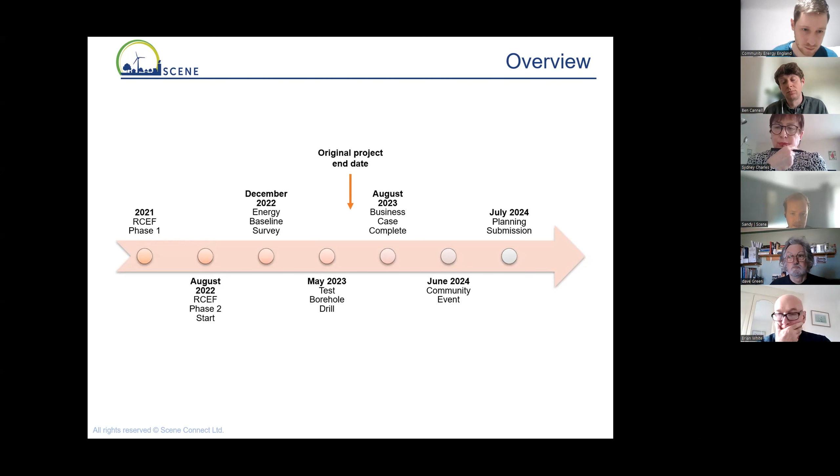We have a community event happening in June to talk through the project and where we go next. We'll be submitting a planning application later this year to try and lock in some parts of this project. So here's a very quick overview.

This isn't the correct graphic, but it's one of our planning graphics, and it shows the network extent. We've got about 150 properties. The green area on the right is the energy centre location, the blue area is where the borehole array would be, and the red area is the planning outline, which is also where the pipe route would go around the village and to the properties.

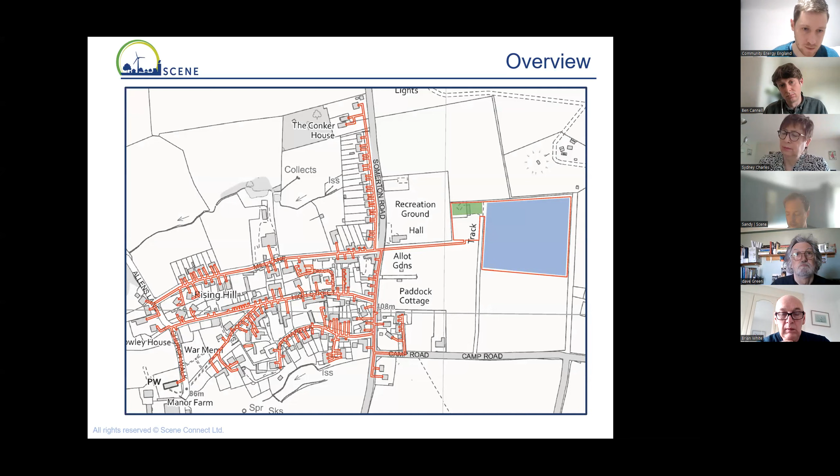A little bit on technical design: this is where we ended up, which was a long and quite challenging process, with 400 kilowatts being supplied by ground source heat pumps from just under 200 boreholes, and a total of 800 kilowatts coming from air source heat pump units.

This is a simplified design, but we went through a very detailed design process to get to this point, and it took a lot of time and a lot of testing of the technical and financial variables.

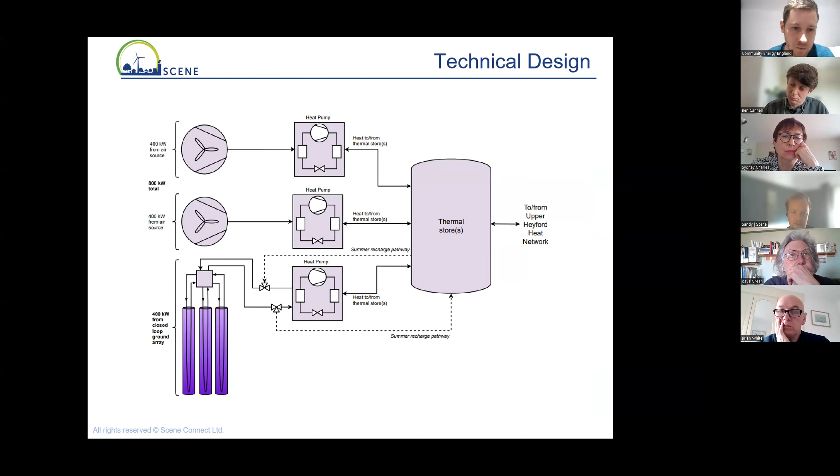So a few pictures just to make it real what we're talking about here. The energy centre site is on a piece of land owned by the parish council, currently tenanted by a tenant farmer. The borehole site is right next to that - in fact, you can just see the sheds in the back there where our energy centre would be. One of our big issues is the aging electricity grid, which I'll talk about in a little while - one of our technical challenges.

And there you can see our thermal testing rig, which sat there for a few days testing the thermal resource from our borehole site. So that's the very quick overview - I hope that's not too fast. I'm sure there are questions, but I'm going to run through where we ended up in terms of challenges.

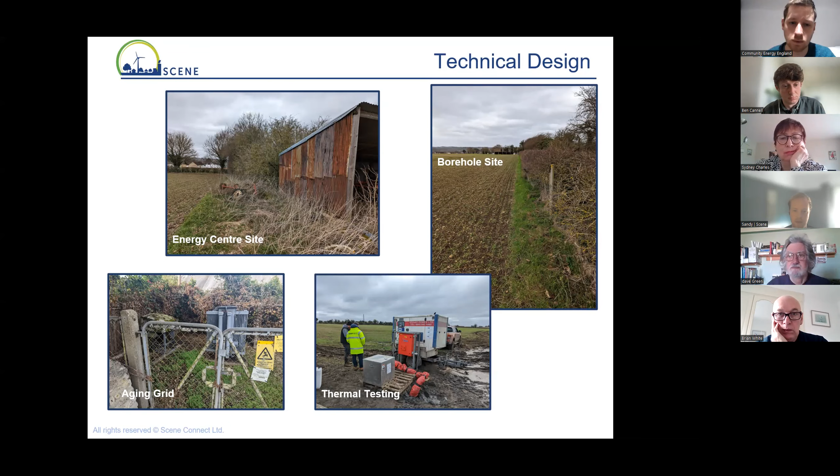We had a few technical challenges. These are probably, in the context of the Swaffham Prior scheme, fairly consistent - at least the low heat density of a heat network in a location like this. We're talking about quite separated properties, a quite long settlement. A lot of pipe work is needed to reach these settlements, and there's thermal losses where those pipes go. So the longer the pipes are and the further away things are, the less suited to heat networks we are.

This is within the Rural Community Energy Fund program, so these are generally rural projects. There's this underlying question about the suitability of heat networks in rural contexts - it's definitely doable, but it takes a certain set of conditions. That's one of the challenges we battled with throughout, and I think any rural project would.

Our thermal resource test returned poorer results than we were expecting. We were working on the basis of the initial consultants' figure of around 4.5 COP - coefficient of performance, for those not in the know - which is how efficient the heat pumps would be, based on the thermal resource we can pull from the ground. That really hits our financial model, and it hits the technical viability of the scheme. It's a real challenge.

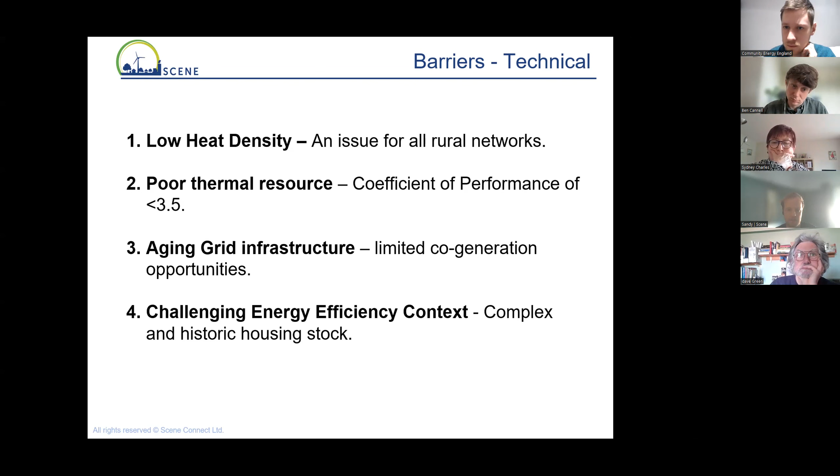So it was about trying to figure out how to model lower than 100% in a rational way. Not just saying, oh, if 50% of people connect, this is what it looks like, because we need to know where those 50% of people are in the village. What is their location? What is their heat demand, etc.

And the last point here is just about legal staging. So all well and good, have a community meeting, get some initial interest. You might get 50% of the village interested in the project. You might get a really high percentage interested. You might want to secure a letter of intent, something to say we would like to go ahead with this should it happen. And that's low commitment. There's not much risk in doing so, and that's something that we got from a reasonable proportion of the village.

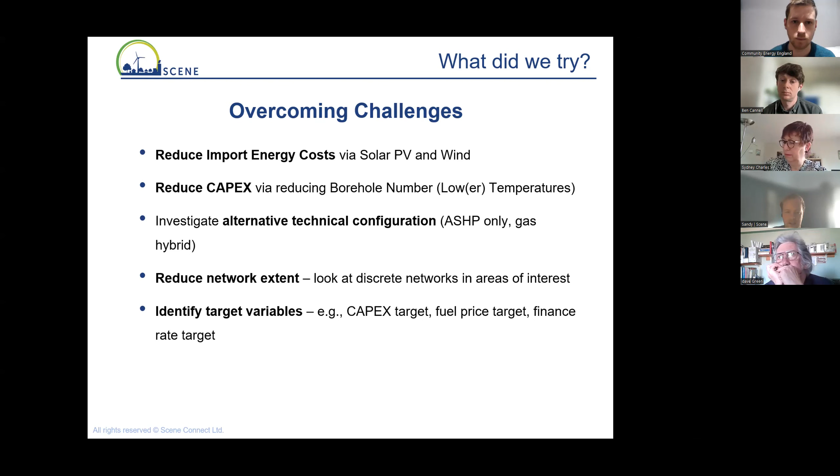And this is quite an interesting one, and maybe something we should have done earlier, is looking at what should our capex be? What's the limit we can go in terms of spend? What's our fuel price target? What do we need electricity prices to be? What if gas prices increase dramatically? How does that affect things? And then the rates of finance we would need.

So very quickly, our next steps: we're talking to the community in June, submitting planning in July, and that's trying to de-risk the project a bit, trying to secure something concrete to help us take forward in future years. Looking at funding for supporting projects, energy efficiency works that people want to do, air source heat pump rollout potentially. Continuing to talk to funders, but it's a bit of a tough one because we don't have a viable business model right now.

And lastly, looking at electricity supply opportunities with nearby housing estates. So with the grid limitations, everyone in the area is trying to make local supply work, battery storage work. So we're trying to kind of jump on other projects nearby to supply our system.

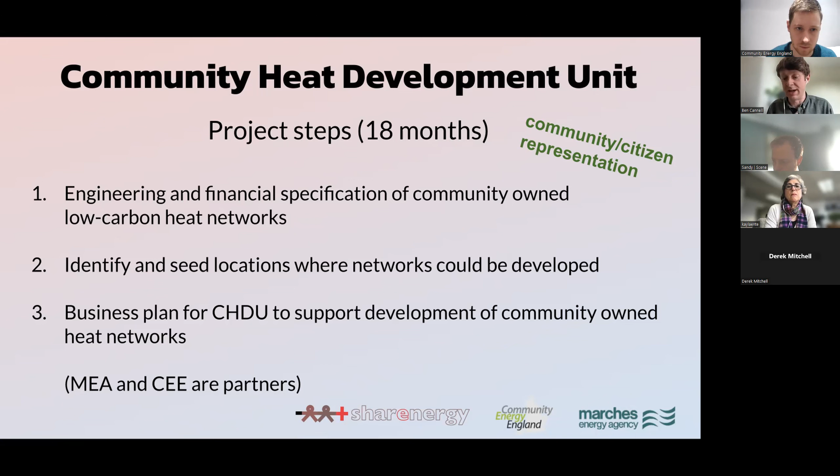And we're working with Community Energy England on this, to help with the community engagement and outreach side of things, and then also the Marches Energy Agency, who'll help us on the modelling and costing of building retrofit, like improving thermal insulation and heat emitters, etc.

So yeah, in terms of progress so far we've mostly focused on research. So looking around to see what low carbon heat network projects have been developed so far, ideally ones which were operational. We've looked at the UK and then some cases abroad, and we've also spent time looking at the different feasibility studies which are available, which have been led by communities. We're trying to take learning from these into our model, to try and shortcut some of the steps in the analysis process.

So the community-led heat networks which have predicted the greatest financial viability seem to have the largest anchor loads in the network, so maybe that's communal housing or some larger public buildings such as leisure centres. Inclusion of renewables in an electrified centralised district heat network always seems to be predicted as improving the project finances. So it seems like that's an important aspect to be able to configure with a heat network.

Targeting 90% of your heat demand using electrified means, and still accepting that you're going to have 10%, say, of your heat delivered by a higher carbon means to start off with, really does improve the project finances from the studies which we've reviewed. So it seems like target 90% electrification, don't go straight onto 100% to start off with. That 10% can always be electrified further down the line.

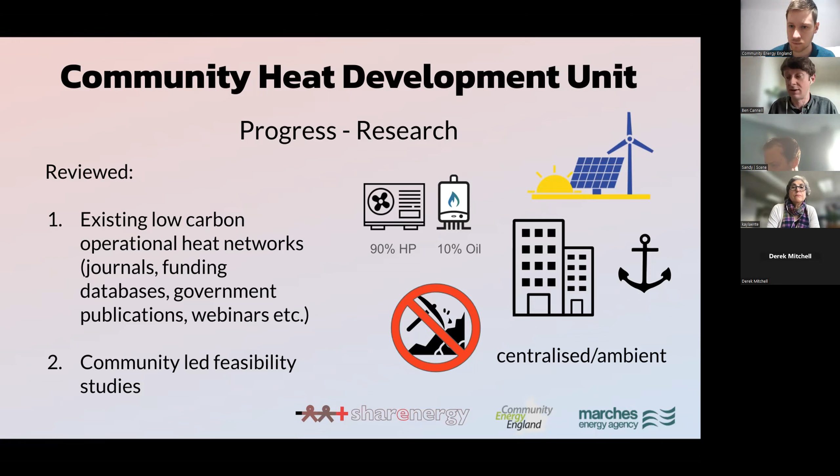Also, we've reviewed different kinds of heating technologies which you'd want to include in the heat network. Mine water seems like a great resource to be used, and has good correlation with high density housing. From our perspective, we're trying to come up with a configuration which is most replicable across the country, and it seems like site to site variation is potentially significant, so there's quite a high risk with replicating a consistent model across the UK for mine water. So that's one of the technologies which we've decided to avoid moving forward for this first instance.

We've also been on a couple of site visits to actually visit real operational heat networks. So one was in Rocks Green, which is in Ludlow in South Shropshire. They've got a biomass heat network which is connected to 96 houses. And then we're working closely with the Bishop's Castle project, which is in South Shropshire again, which is looking to have a centralized heat network powered by a large air source heat pump, combined with an onshore wind turbine.

We've been working closely with the project team there. It's Shropshire and Telford Community Energy and Lightfoot, which are the community groups leading that project. And good news recently in that they received the award of the second stage of CEF funding, which is great news.

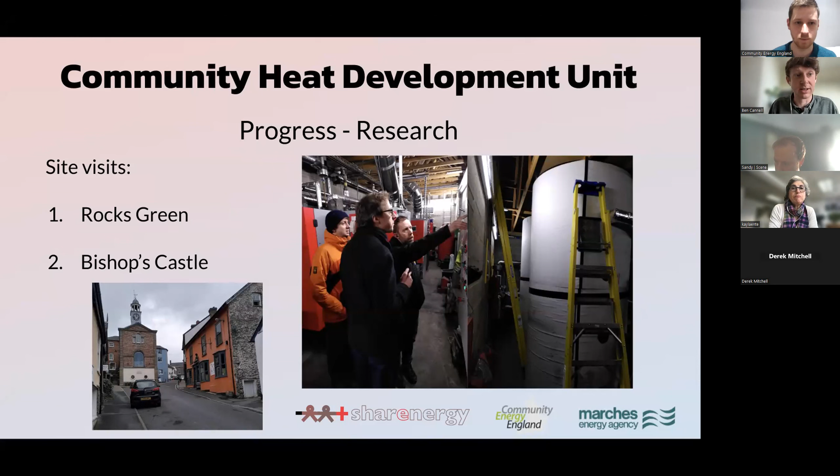So the next stage that we're working on at the moment is the development of our heat network specification. So what configuration of heat network are we going to be targeting that is viable for community ownership. So we're developing a techno-economic model, and we're hoping to work with an engineering focused technical partner on this, to understand what ranges of heat demand we look for across the country, coupled with building density, and also coupled with what level of renewable generation capacity.

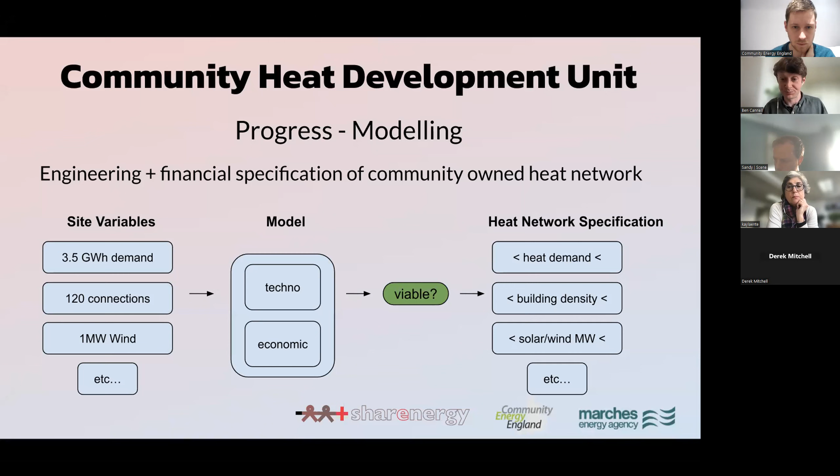So what different ranges of those input values would mean that from a modelling perspective, we think that a community-owned heat network is financially viable. And so once we've developed this specification, we're then going to use the GIS sieve mapping approach, where we are applying those ranges of variables to a nationwide site search. So we can select sites across the country which we think meet this heat network specification.

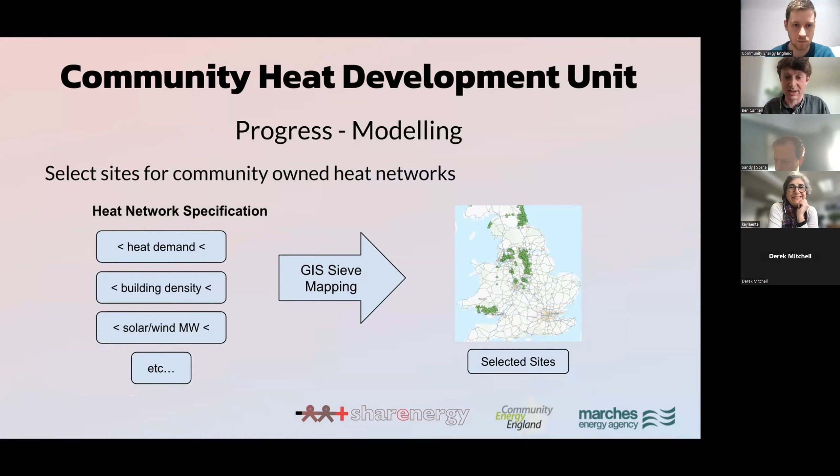So once we've identified these sites, we'll be working with Community Energy England to approach community ambassadors, leaders, and community groups within these locations to try and stimulate enthusiasm and uptake for pursuing the development of a heat network. We want to seed up to 4 case studies in these locations, with a more detailed, lightweight feasibility study assessment of the heat network configuration at these individual locations.

We don't have funding to take the project further than that at this stage. That stage might involve some refinement to our heat network specifications. So maybe we'll go from saying we're looking at these ranges of heat density and building count, to saying something like we're looking for a certain number of terrace houses, a certain number of communally heated buildings, and a leisure centre - something more specific across the country.

As part of that, MEA will be supporting us to understand how building fabric upgrades can be included into our model. Does it make sense to be running our heat network at a higher temperature with less building fabric upgrades, or a lower temperature with more fabric upgrades?

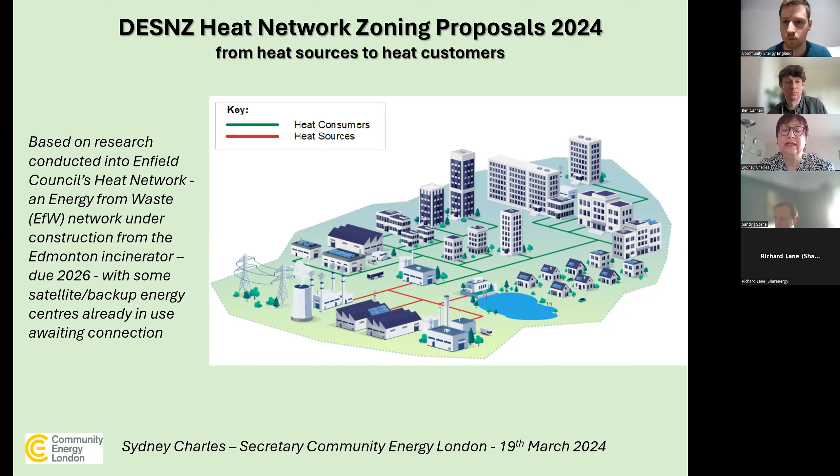Sorry, my name's Sydney Charles, and this is going to be a whistle-stop tour. I was interested in heat zoning following on from an interest in the Edmonton incinerator, and people there are unhappy with having to carry on producing rubbish and also digging up the roads. So we started looking at, well, if they didn't take heat, what would the implication be? And then I started looking at heat zones. I'll go through these aspects very quickly, and at the end then ask some questions.

So, what is a heat zone? Quite difficult to find a picture of it, but I found this one here of a possible sort of heat zone with the barrier around it. And my issue is that if you're not in it, as Sandy mentioned just earlier, if you're not going to be in a heat zone, then they're not really interested. On average, they're thinking of 18 zones a year, coming to 459 zones by 2049.

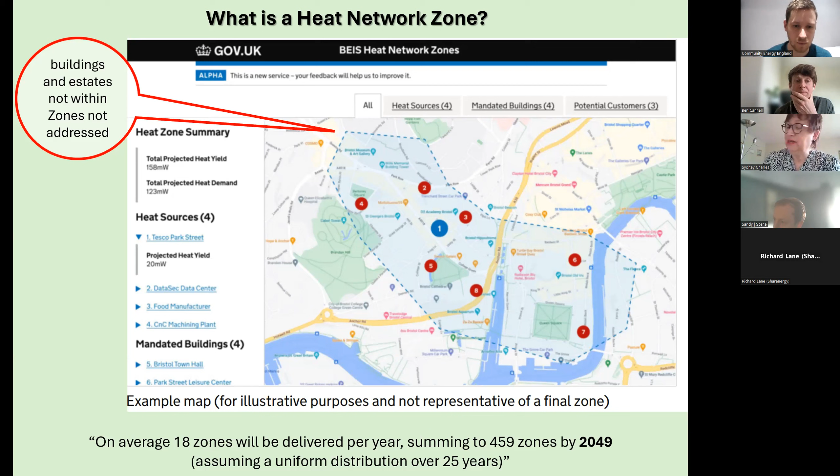So that seems like a long way away, but the definition is a formally designated geographical area in England where heat networks are expected to provide the lowest cost solution for decarbonising heating. But as I said, if you're not in one, then you're not getting any benefit.

So what are the aims of having these heat zones? The primary aim is low carbon heat, which we all agree with, and the consultation asks, well, what is low carbon heat? Can we allow 147 grams of carbon per kilowatt and still call it low carbon? I think most people replied, go with the 44.

Now, in the studies that I've done in Enfield, their heat network, they say that it's only 21 grams of CO2 a kilowatt, but they exclude all the infrastructure that you need for the heat network, which seems a bit of a missing out. Secondary aim, of course, is low cost heat, and Ofgem is supposed to be looking at that for consumers. But Enfield in particular will spend at least 100 million to deliver heat compared to just leaving people to do their own heat.

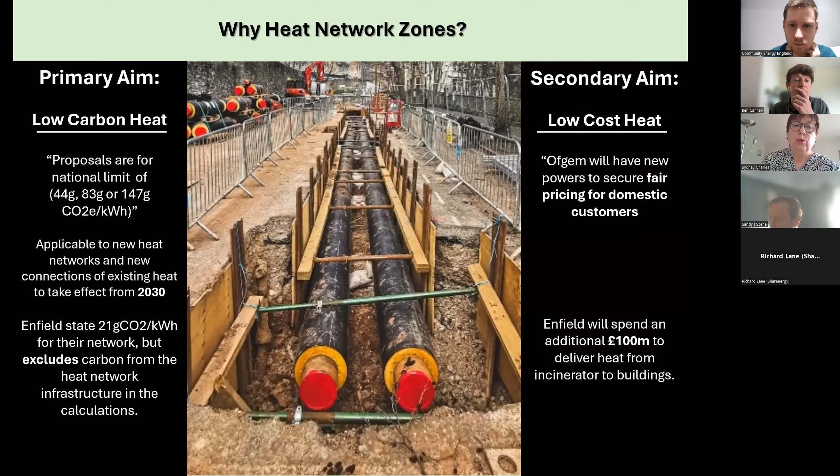Another aim, which is not actually stated, is that heat network zones will also provide project sponsors and developers with a certainty about connections that will be required to secure investments for construction. So enabling the heat network industry to be profitable seems to be another aim. It's not actually stated sort of upfront.

So which buildings will have to connect? I'll start with what are not required to connect. Ordinary residential buildings with their own heating systems won't have to connect, but they could do. And any building, as we just mentioned, if they're not in a zone, they won't have to connect, leaving them with no sort of government support for low carbon heat.

But who will have to connect is new buildings, non-domestic buildings, and buildings that are already communally heated. Now, this one that I've got a picture of here is Enfield Wash, which has got a Kensa ground source heat pump array, paid for, I believe, by the local authority decarbonisation fund. So the capital has been paid for, and they say the customers find it very cheap, but I haven't got evidence of that yet.

But the Chartered Institution of Building Services Engineers are unhappy with the consultation, as it implies that even if a development can demonstrate a lower carbon heating solution, they will still have to connect if they're in a zone. So they're not happy about that.

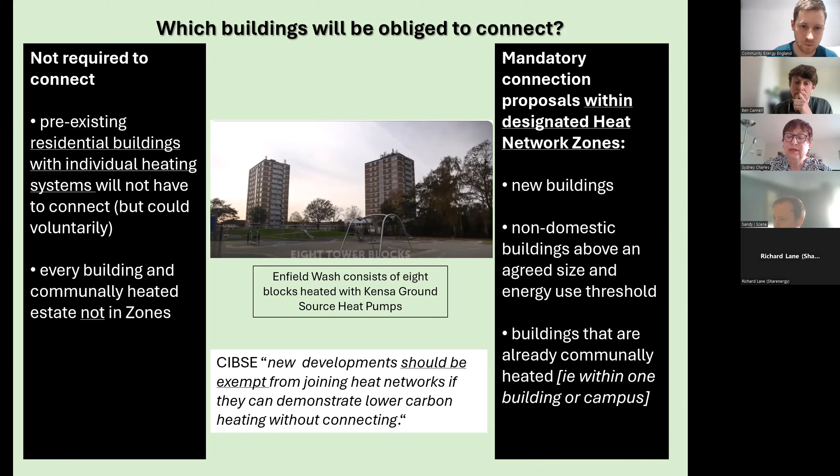So who would administer this? Central authority will have quite a big department in DESNZ, and there will be zone coordinators in every borough. You can read what they have to do, but appointing delivery partners is basically giving out the work to commercial companies, which one has to be very careful with, and also requiring owners of heat sources to provide heat, which I know one of the consultation responses from a data centre association was not happy with, for various reasons. And they are thinking there'll be 5 full-time staff per zone.

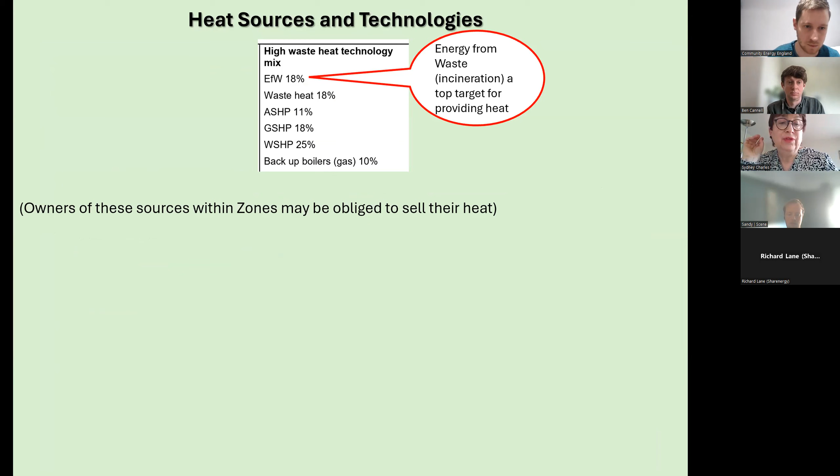Of course, that's up to 2049. Well, I certainly won't be around by then. So what kind of heat are the heat sources they're expecting? They're expecting 18% of it to come from energy from waste, which is why my interest is quite high in incineration. And owners of those sources within the zones may be obliged to actually sell their heat.

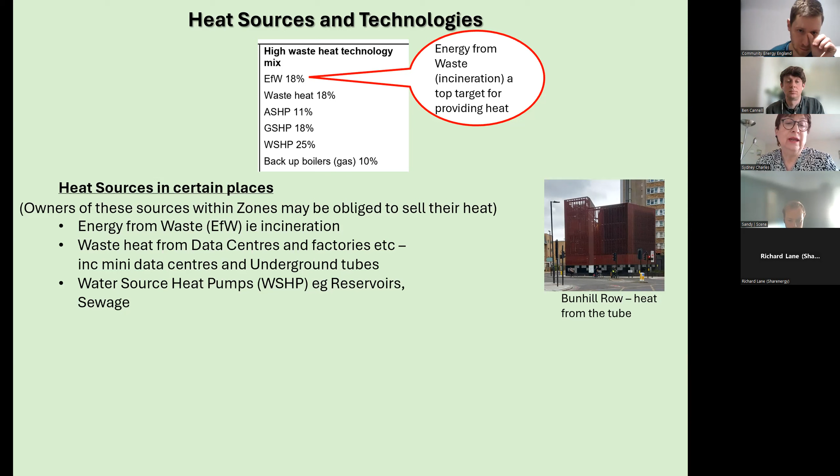Some heat is in certain places and it's fixed, like waste heat - the picture there of Bunhill Row is getting underground heat, and reservoirs, they don't move, they're there. If you've got homes near them, that's fine.

There's also heat in most places. Now obviously it's different in different places, but generally there's always air, there's always water, there's always something from the ground, possibly geothermal.

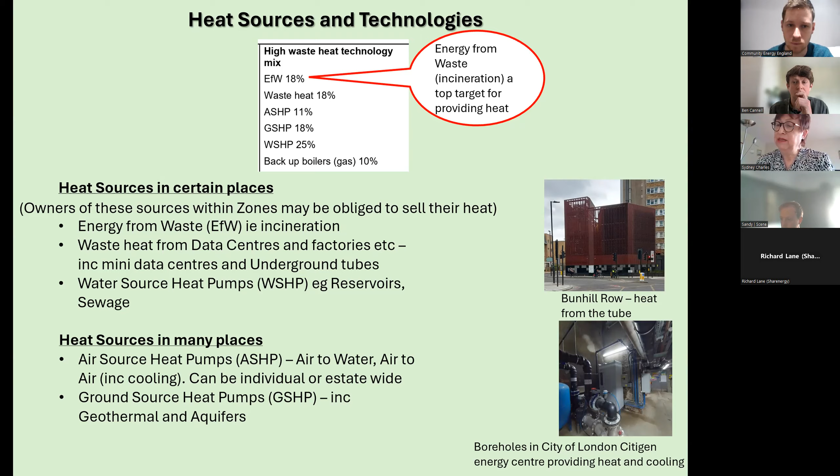And that's a picture of a heat network in the City of London, which has got ground source heat pumps, as they call it, going down to the aquifers and heating between the Barbican and the Guildhall. If CE wanted a visit there, that could be arranged, because I've been on one. That is a very interesting example, showing what can be done.

So the heat technologies, which obviously you all know, that's suitable for district and communal energy from waste. This one in the middle is a community centre in London that one of the Community Energy London groups put in - DEFOS. And then there's obviously ground source and geothermal.

But there's a point here that the closer the heat source is to the customers, the lower the carbon, embodied carbon, and actually loss from heat and disruption of long pipes. It's an obvious thing to say, but that came up in Sandy's talk as well, didn't it - that if you've got long pipes, that puts the whole thing up.

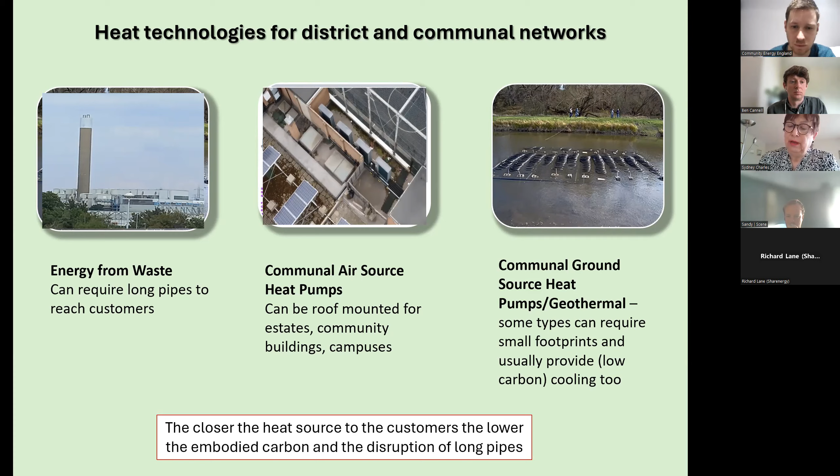So against that is the people left over having their own individual heating systems, still buying gas boilers for quite some time. That's used as a counterfactual to show that in Enfield it's lower carbon to have heat from the incinerator. But then they've gone away from that and said, actually, that was high emissions - maybe they should be using air source heat pumps.

It's all very vague. Another solution for individual homes - this was written by someone called Chris Twinn of LETI, 'Life After District Heating, on route to zero carbon', which sort of says it all really, that if you've got a mechanical ventilation heat recovery system and very good insulation, actually you don't even need a district heat network. So something to be considered.

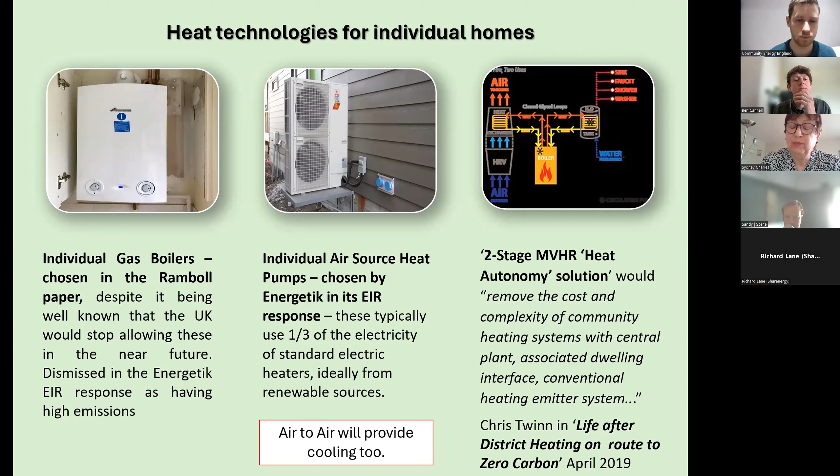And it's also worth mentioning that the air-to-air type will provide cooling, which is increasingly important nowadays.

So who are the stakeholders here? Well, customers really should be the main stakeholders, but I've got the planet at the bottom as well, who you can call a stakeholder. And the people who actually know what they're talking about, what the options are - people such as yourself, architects, build professionals, and of course communities. So their voice and their ideas should be paramount.

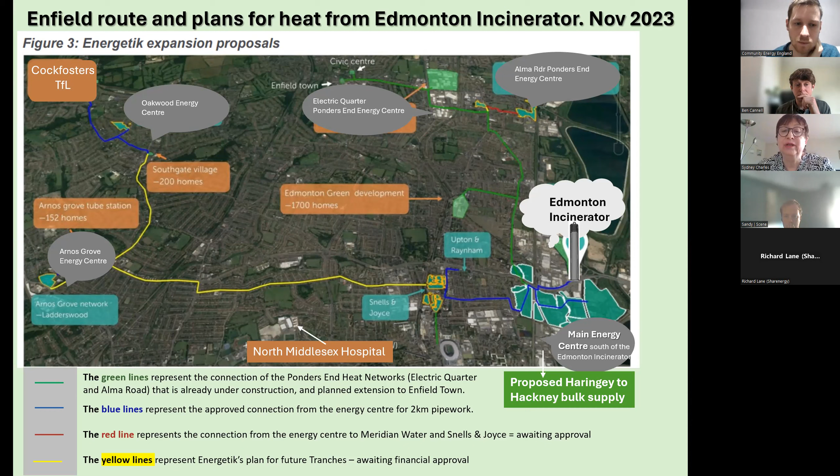But the money they got was actually for the green and blue lines of pipes. The green ones they're putting in, the yellow ones they've had to wait for reassessment because it looks as though they spent the money - they haven't got any more.

So the impact assessment on the consultation, first of all, they had one for stakeholders with a low carbon option, similar to the Chris Twinn one, a low carbon counterfactual. They didn't actually use that in the consultation.

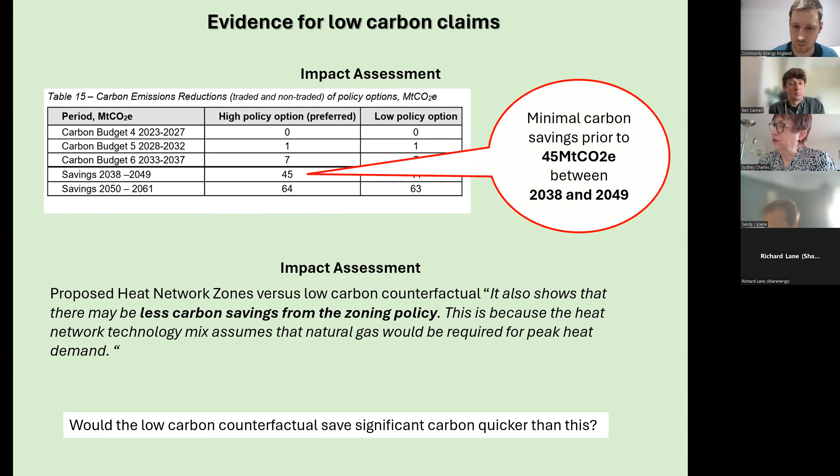So that is how much it costs.

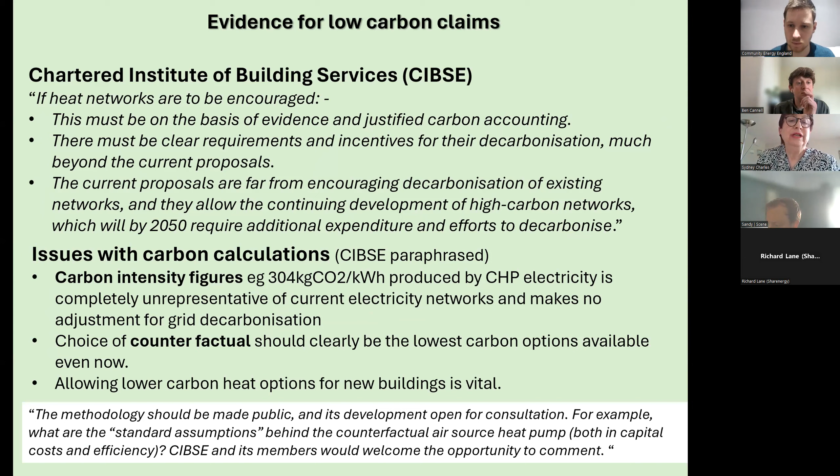Just some statements from the Chartered Institute, saying how important it is to be on the basis of evidence and justified carbon accounting.

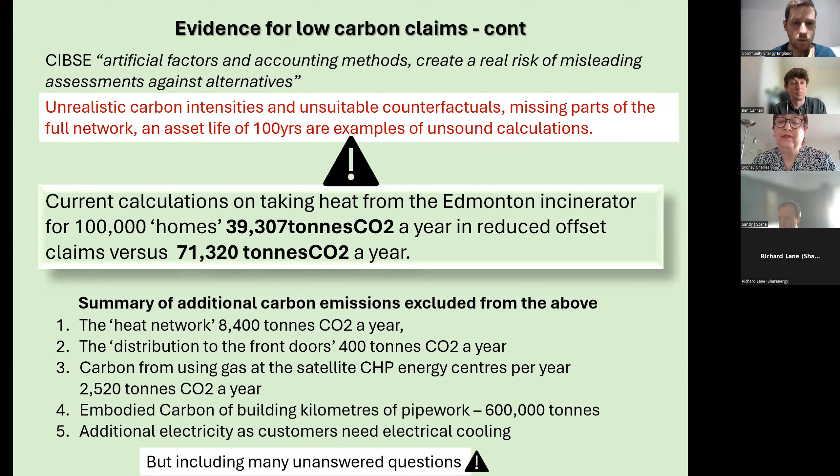I've put that warning on because, quite frankly, the figures I've been given are, I'd call, dodgy. My point is that it's important to have sound carbon calculations, and what I'm seeing is not sound.

In the impact assessment, they did a theory of change with a weighting of 50 for achieving policy objectives, which was low carbon and low cost. Again, if the facts behind low carbon and low cost are not sound, that was not a good decision.

And they ignored the novelty policy proposals, which I think was mentioned earlier, about the importance of electricity and gas balancing, and general support from the government, which was given low weighting, so none of that got considered.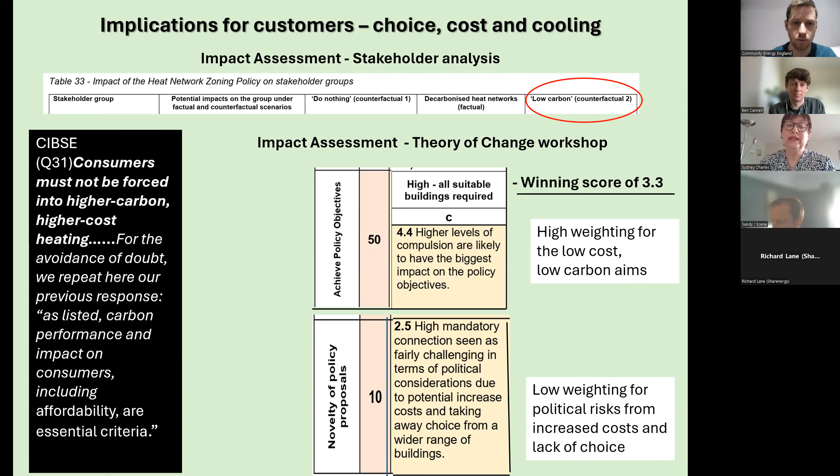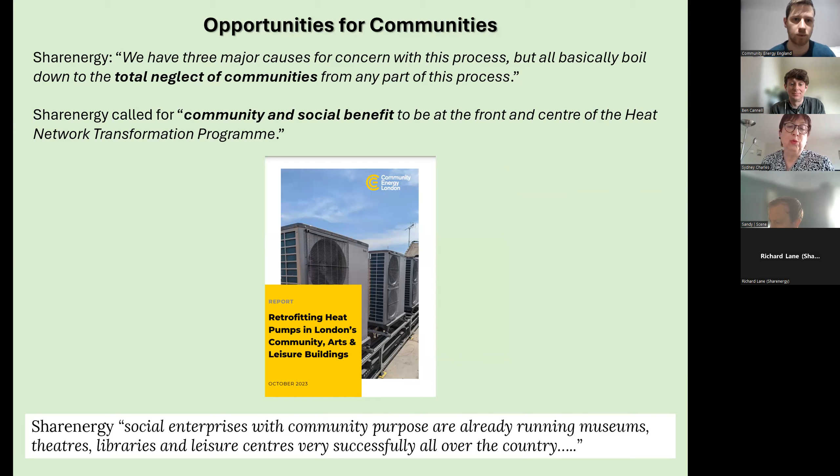The opportunities for communities, well, you all know that, so I won't talk any more about that. I'm quoting Sharenergy there, by the way.

So the next steps are: the recommendations go to the ministers. They do a mapping exercise, which is absolutely needed to identify potential heat networks - that would help you, Ben, wouldn't it, if there was a very good mapping exercise on that. Then they'll appoint the zone coordinators and start work between now and 2049.

I've put in this extra step: what if we have a new government? Could they review the recommendations in light of their priorities? And certainly, could they review the methodology of making the important low carbon claims?

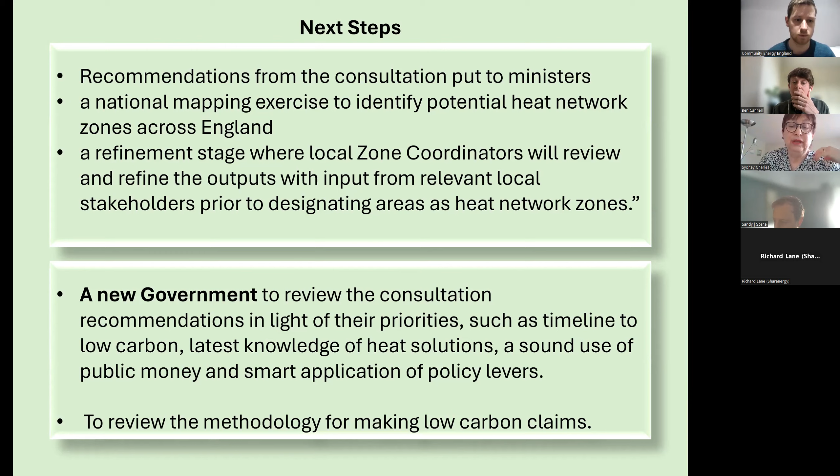So that comes to an end of it. Thank you very much for listening. And for any questions, I shall stop sharing.